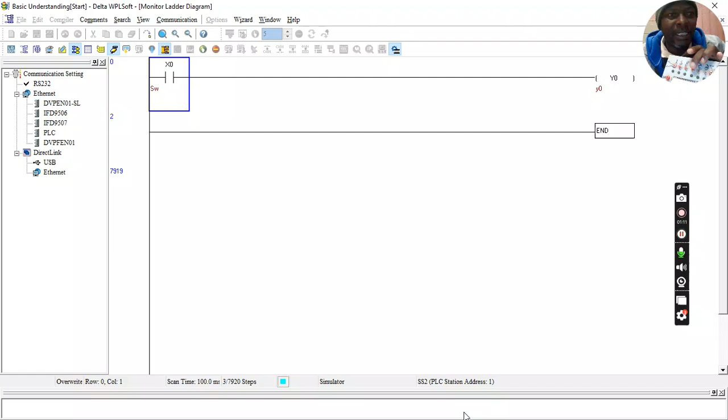Those are the toggle type switches. We have other switches that you press and release, and normally they are springy. You can feel the return when you press them. So those switches can also be used. This is what we use actually for our stop and start there, press and release type switches.

So now, what we're going to do is we're going to say, what if this switch here was a spring type switch? What would it mean? Remember with the toggle type switch, I hope you remember how we got here.

A quick reminder probably will not hurt. Or rather, let's have people go back and watch the other video if they want to remember how we got here, because otherwise our videos are going to, if you're going to keep going back, then our subsequent videos are going to become extremely long. We don't want that. You can get tired from looking at this ugly face all the time.

All right, so now, if you miss this session, just go back and look at that session there. What I'll do is I will remind you that we were toggling the switch by simply saying what?

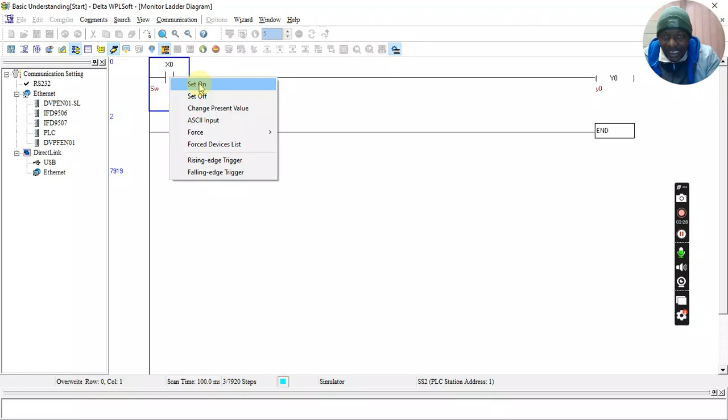Remember, we have to be on the simulation mode, on run, online and on run. Then I can set this on. It's toggled on. Our machine is running, whatever that is. Our output is running, and when we toggle off, then our machine goes off.

What if we're the type of switch where as long as I'm holding the switch down, it's on, but the moment I release my hand, which is the press and release switch, it goes off. You want now to be able to start a machine, but you don't want to have, it's not a toggle type switch, and once you release it, the switch also releases. You don't want to hold the switch, to press the switch the entire time that the machine is running.

So what do we do? We introduce the concept of latching. All right, so let's show you how this machine can actually, as it is now, there's a direct relationship between the switch and the machine. This machine is only on if the switch is on.

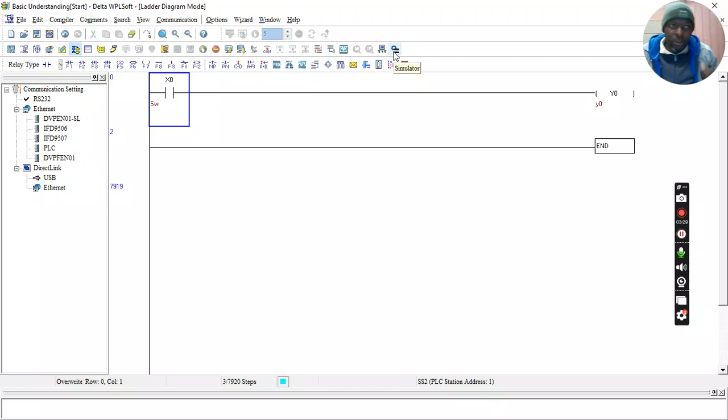Now let's have a scenario where we get out and you say, we don't want that. We want to be able to release our switch and yet our machine stays on. That is the concept of latching. All right, we put on our machine, we take away the power from the switch, and the machine latches on.

All right, so let's say if I have, this is a contactor or relay. This is a relay output. So what does it mean? It has contacts. This is the coil. The output is the output coil. But we can have a contact.

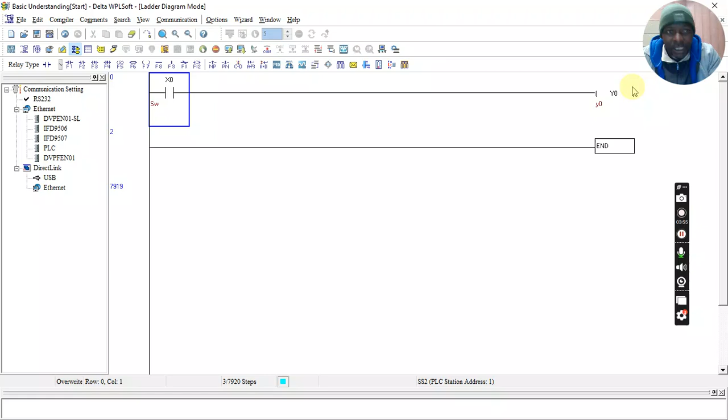Toggle switch was better with the light, but a press and release switch will be better with the machines. Let's say it's machine A. All right, let's say, okay.

Now machine A, once I start, I don't want to use a toggle switch, so let me rather not call this a thing, let me call it X0. Let me rather call it a start for a machine. And these start push buttons normally release once you let go. All right, once you let go of them, they also discontinue the contact, they actually break.

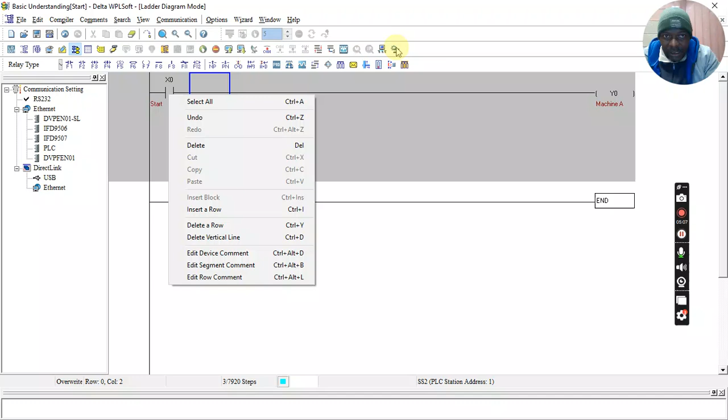So we come and say this is the previous situation, so nothing has changed. Yes, set on and the machine goes on. But this is a start button. The moment I release that press release switch, machine goes off.

That's not acceptable, can it? So we can't have a situation where you have to hold, you have to press, you have to be stuck to the machine. We can't have that. So what we then do is we say let's latch. So we go back and introduce the rung that we had introduced.

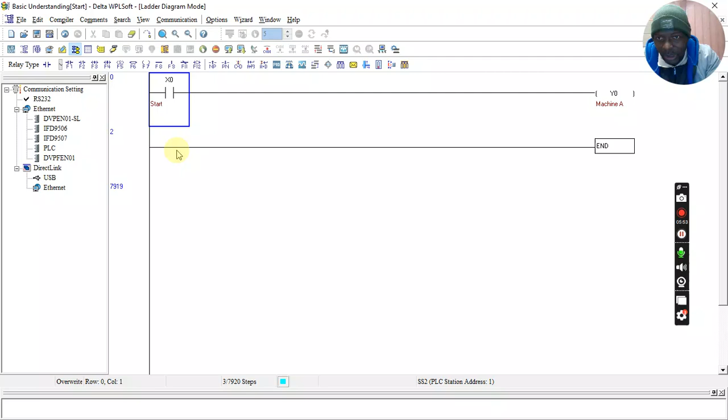Insert that row. Then you say we want an output that is controlled by Y0. If Y0 is on, we want this coil to actually energize another contact. So we'll come and call this contact. Remember I said I can just come here, say I want a normally open contact there, which is going to be controlled by Y0.

How do you know it's controlled by Y0? It has to have the same name. It's coming from that same relay or that same contactor.

So now what we then say, we could either press that, where it takes us straight there. We can decide we want it to be Y0. We can come here and say Y, and it's already 0. And you can see automatically the moment you say Y0, it brings back the comment that we gave there, the name that we gave there. Said it's machine A, so it says machine A.

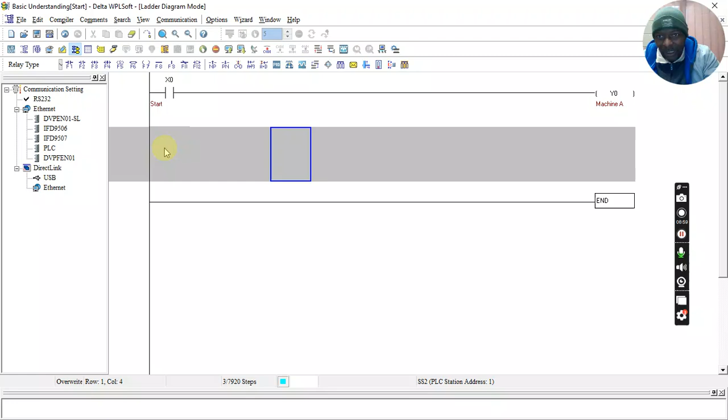We could have done that, but remember I said we could also have said, once we are in the space that we want, we click on that space, not there, on that space, we could come and say, okay, with F1 we can achieve the same. I can say function F1 and I achieve the same. You can see it's the same thing. Now all I have to do is say, no, I don't want the start, I want the machine A.

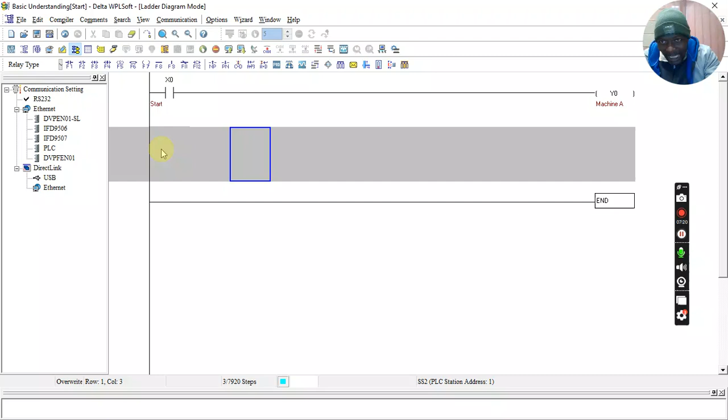But remember there's the third option of simply saying, again, I have to be in that space. I'm moving away to show you that I'm moving away. Look at the blue box, but I want to be in that space. So what do I do? I say load, short for it is LD, the mnemonic for it is LD. So load, then you say what you want to load, the contact Y0.

So if we do that, you will see that I could open the dialog box again. You can see that it's the same dialog box that you go through. F1, same dialog box that you go through, clicking on the icon. So it's the same thing, but I don't have to do that. I can just type it there.

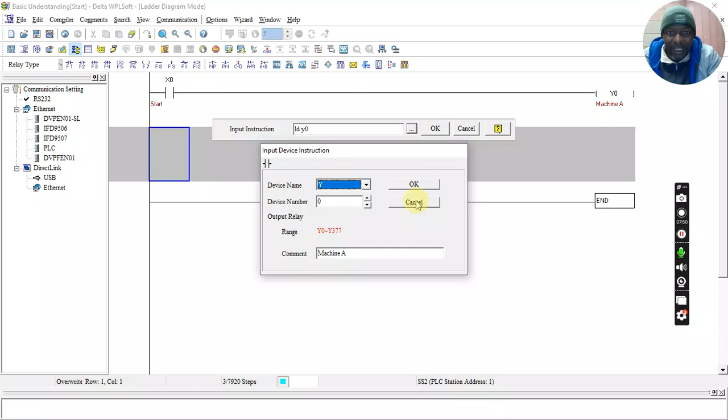If you can't remember, let's suppose you don't remember the instruction, let's say you've opted for the instruction. There are two ways of opening that instruction. I can either just type away, I'm here, I want to be there. I'm just typing LD right now, and it automatically gives you that dialog box. So, or I could double click on it. If I double click on it, again that dialog box brings up. So it's up to you.

It's so user friendly, it's so user friendly. I'm feeling so befriended by this program right now.

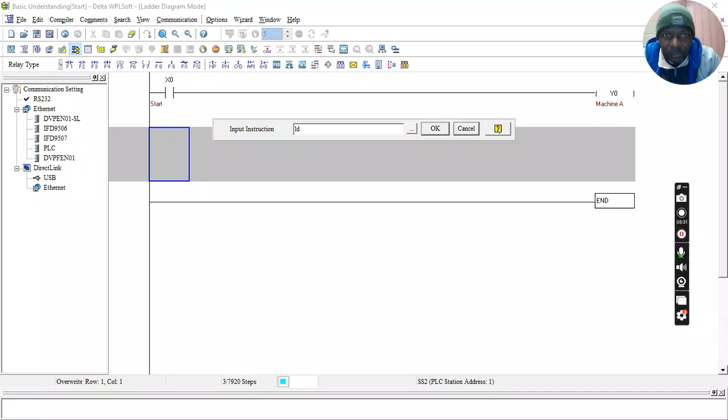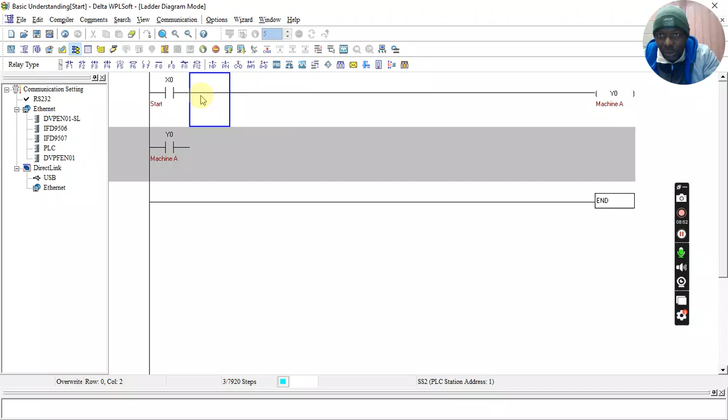So parallel means I have to bring that line down. So what it means is I've got two paths to the machine to energize the machine. The one path is my start button. The other path is the machine itself, a contact in the machine itself. You will see when you do the practical how this works. I can actually start the machine with this contactor. I don't have to use the start button. I could actually press the contact, press down that Y0 contact on that coil, and this machine will still start.

So let's suppose my start button is a problem, I can still start my machine directly by depressing Y0. You'll understand this a little bit more when you get to see the physical components.

But in this case, it's a little bit different because this is a PLC. So with a PLC, if I'm going to want to jumper, I'm going to have to use wires somehow because it's not a contactor exactly, it's an internal relay.

Yes, you can wire to the output Y0, but you can't energize the coil. The coil is energized by the program.

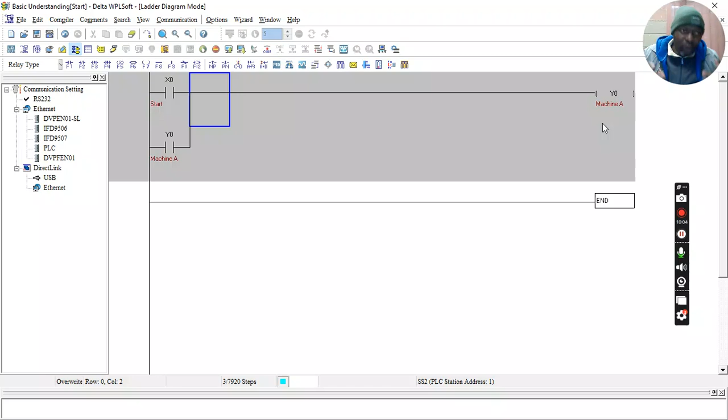All right, it is the soft wiring aspect. When you say soft wiring, we mean programming. When you say hard wiring, we mean the physical wires, the physical components that you can hold in your hand. So remember the difference between soft wiring and hard wiring.

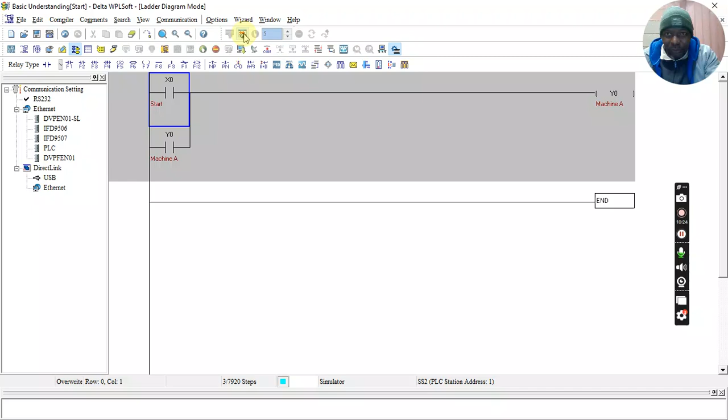Now let's see what happens if I want to start. Previously, if I say start, I have to debug my program, check it for errors. I don't have to run this 100 times, normally just once, but you can run it more times if you think it might fail to restart. So you can run it more than once, but typically I just debug it once. It's probably bad practice on my part, but honestly I normally just debug it once. In any event, I haven't had problems so far. Maybe in future if I encounter problems, I might learn to do the better practice. Practice makes perfect, right?

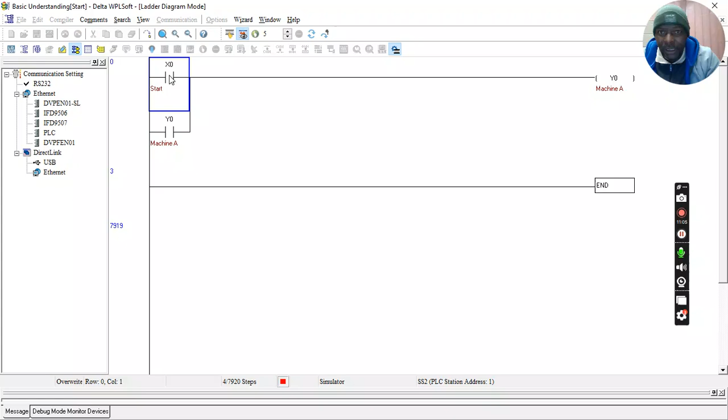So now let's go and try to start. I'm still on debug, so I have to get out of debug and put my PLC online, my program online. Now what's happening? You can see it's on stop mode, so I have to go and put it on the start mode. There's the run mode. Now it's on run mode.

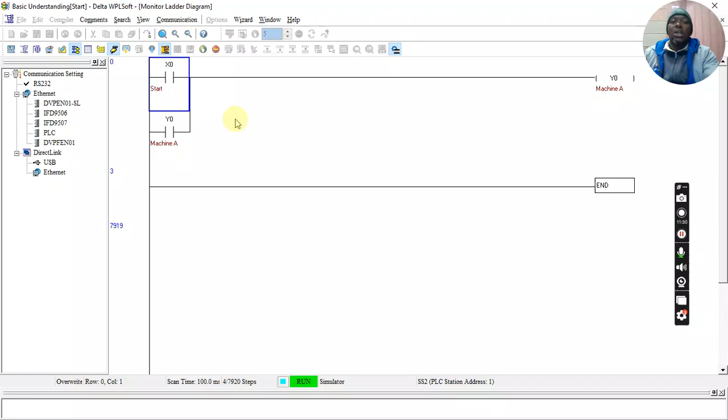Do you want to run? Yes, I want to run. So I'm running now, you can see it's gone green. The simulator is on run mode now. So now what I can do is I need to energize it. It's a physical contact, so how do you do that? By putting power, by pressing your switch.

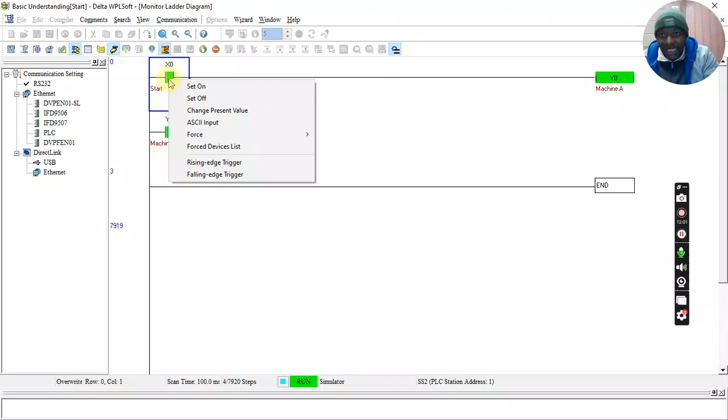Now you can see what happened here. The moment the Y0 energized, because Y0 is the same as that, this is the same component, when this gets energized, that also gets energized. You can see now you've got two paths for the power, there's the one path, there's the other path. So because the machine has got a path to itself, I do not need my start anymore. Hence, I can switch it off and my machine remains on. This is what we call the latch.

We must then remember that I started on an existing program, so I modified an existing program. So what I need to do, I need to save this as something else. Now, what you'll notice here, there's no stopping here. Remember with the toggle switch, it was easy, I could just say on, off, on, off. But if I latch, now I must have a way of stopping. I'm not going to do that now. All you do now is you start the machine and you can see the machine does not stop. I want you to understand the concept of latching, I don't want to confuse it with other concepts. So I will stop right there.

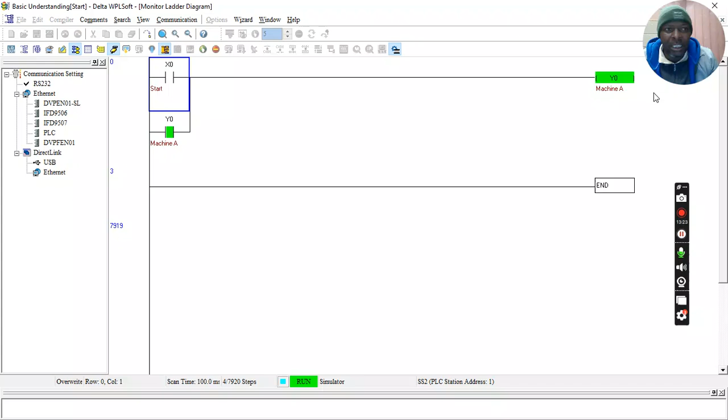Let's meet when I bring back this one here, but I will show you how to stop once, because now it looks like this machine is going to run forever, this machine is going to run until Jesus comes. So now we are going to come back and introduce the stop. I want to put the stop on its own for a reason that I will explain when I get to that part. For now, that was simulation.

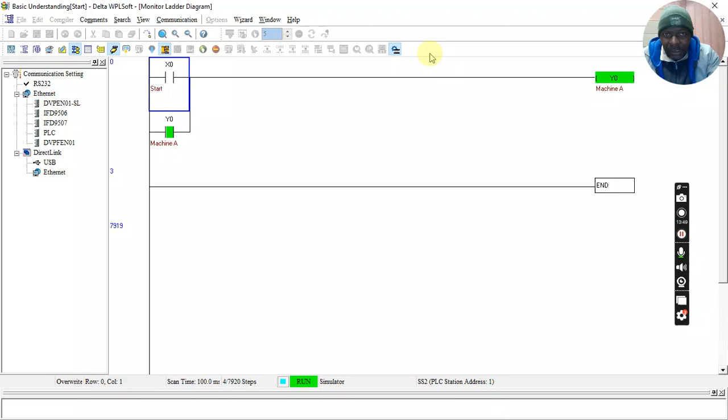Let's stop, and there's our program. Now let's save it as something else because I don't want to interfere with the other program that is saved somewhere. So let's save as, and we'll name this basic understanding, yes, basic understanding, I will say latch, the latch, basic understanding, how to latch, the latch. But I've only saved that part.

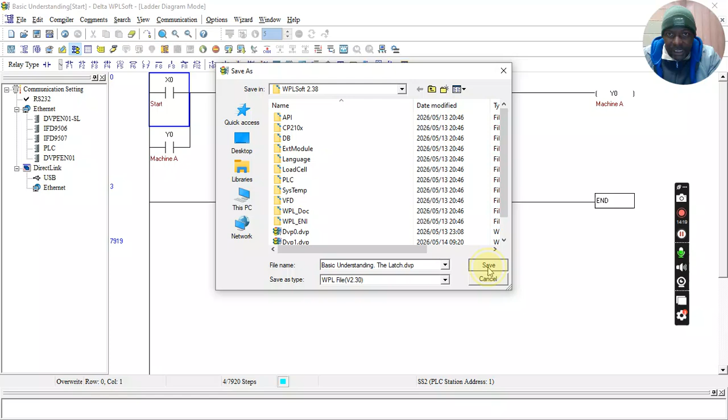Okay, it still says start, yes, because it's still the same concept. So I will leave it there.